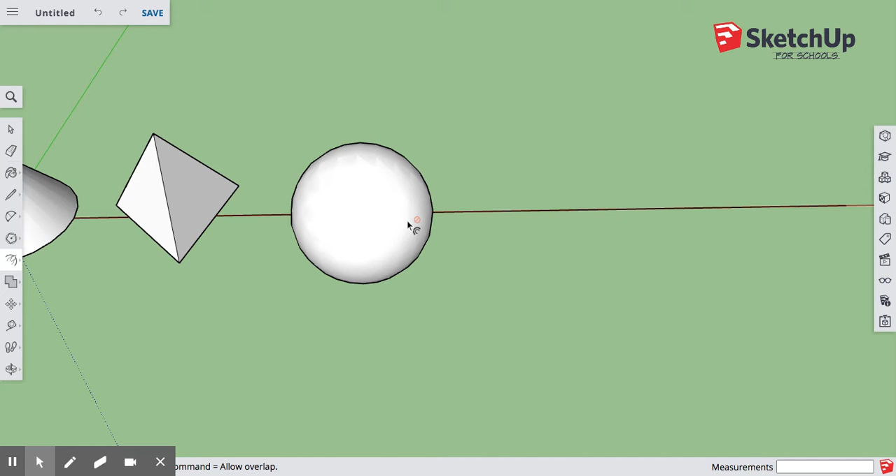All right, the next shape we're gonna make is a diamond - not necessarily like a gem, more like the diamond you'd see on a ring. So you take the polygon tool, make sure it's locked in on 3 right now like a triangle from our triangular pyramid, but you want to go 6, enter, to make a hexagon.

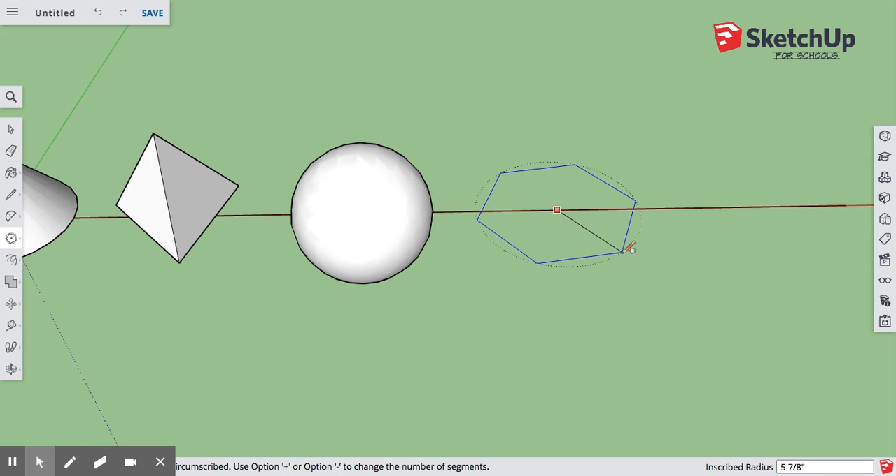Somewhere on the line, make sure you have enough space, and you write 5, enter. Now at this point, anything attached to this hexagon, you can delete the line. You can delete all those other lines.

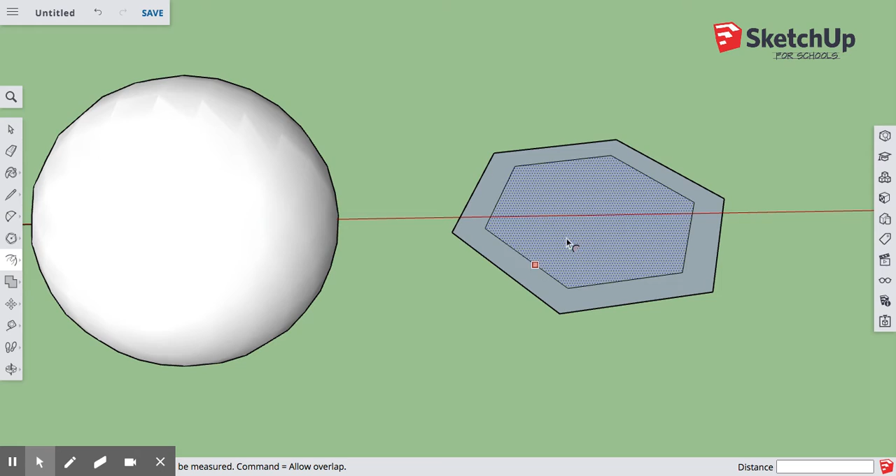So good. Now we're going to use a new tool. In push-pull, the bottom one is called offset. If you hover over the edge, all of the outside edges should turn blue. So you click that, and you write 1, enter. Now you've pretty much made the same hexagon, but a little smaller.

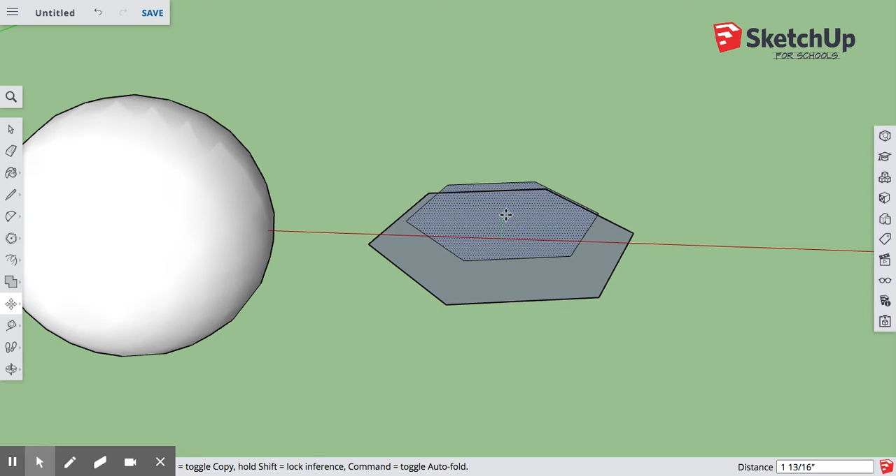Since you're offsetting it, it's the same distance from each of those sides. So that's a new tool, and now this is a new strategy with a move tool. Naturally, if you want to move this, it'll just move that one because they're 2 separate individual shapes. So if you click the move tool to access it, then press the up key on the keyboard, that locks onto the blue axis.

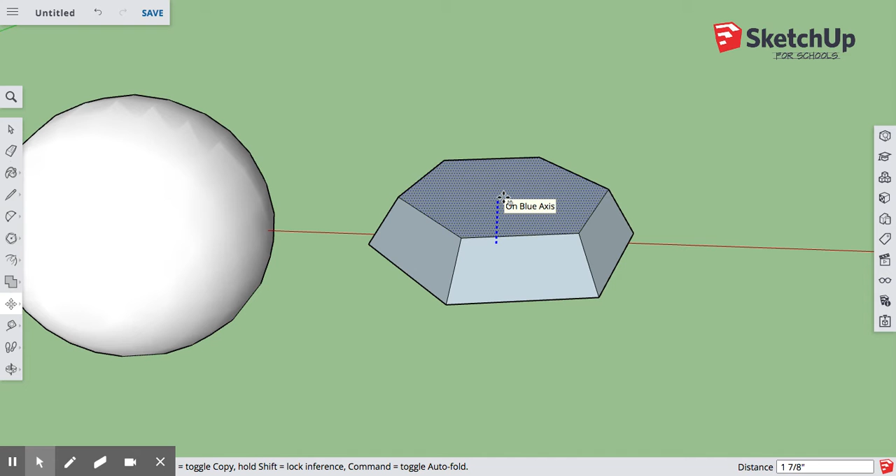So just to go over that again, if you click this, it'll naturally be moving along the red or green, but if you press up, then it locks onto the blue, and you go up 1, enter. So now you made that. That's the start of it.

Now something you're going to want to do is highlight everything - this might be helpful at this point. If you highlight everything and right click, there's a button you could click that says Find Center. Now you'll see there's a little dot that forms right there with what you highlighted.

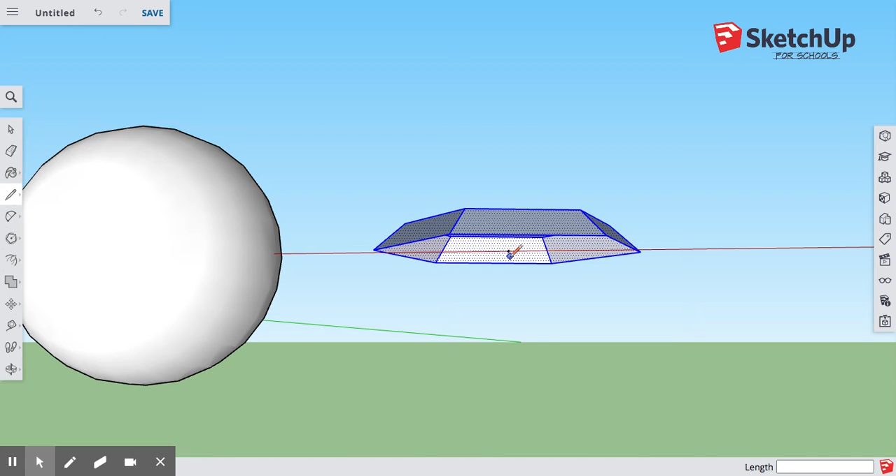So now the rest of this is pretty easy - you're going to just go down on the blue axis, 5, enter. And from there, from the tip of that, to every part of, really every corner. And that's your diamond. So very nice.

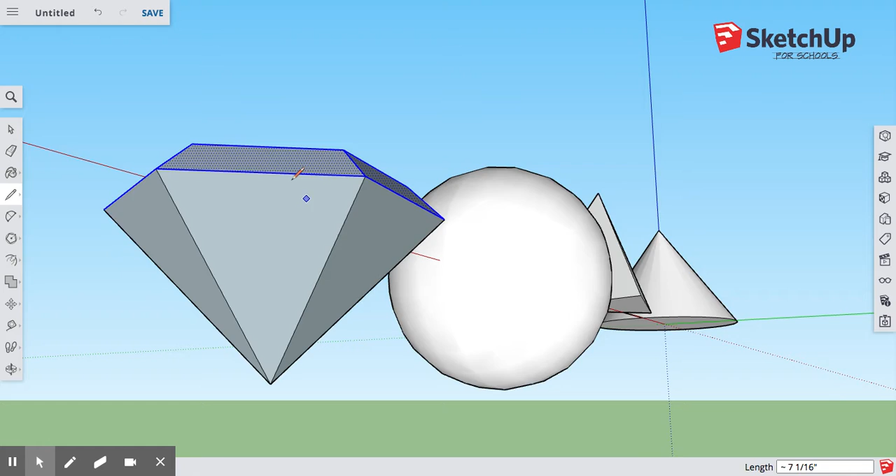Beautiful. Last thing we're going to do is make an egg. So you're going to take a circle. We're going to go as close to the red axis as we could find, and 5, enter.

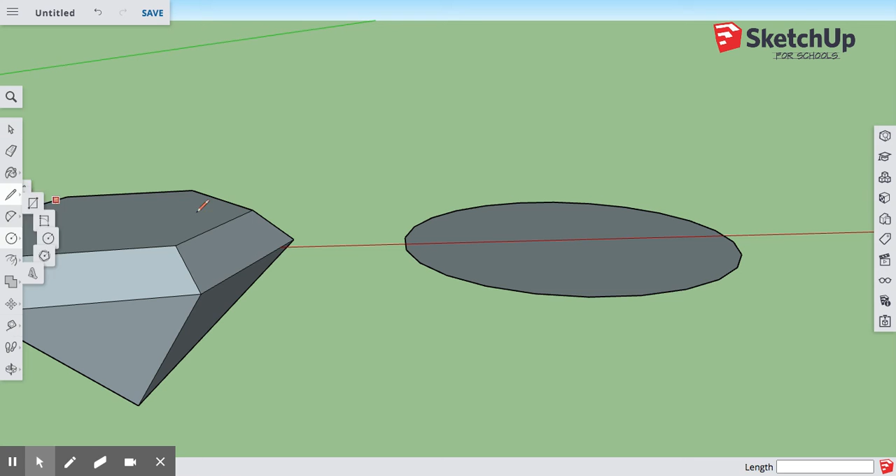At the center, if you can lock in on the center - I don't know why it's not helping you find it, it makes sense actually, so we're going to need to find the center. You can go to midpoint to end over there just to cut it in half. Then you can use the circle tool, it should now lock in on the center. And if you press the left key, now that locks in on the green axis.

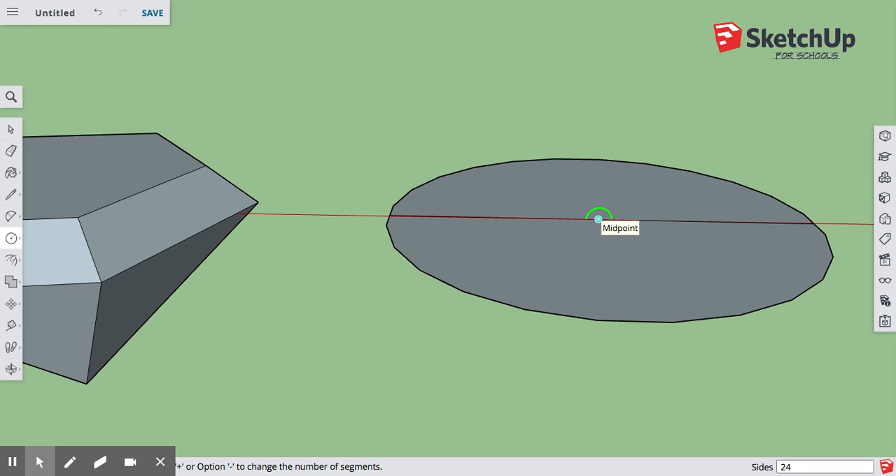So the left key - now we're working on pressing different keys to lock in on different axes. That's new for us. So we're going to make another circle that's the same exact size. Good.

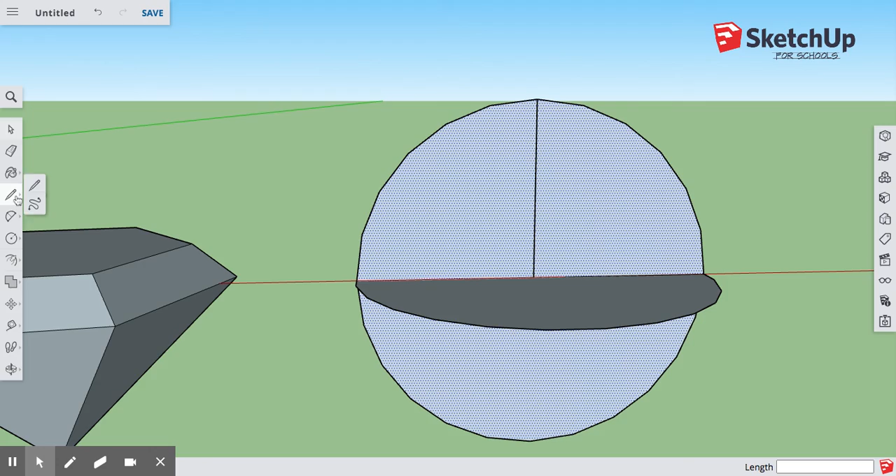And from there you find the center again. You cut this in half vertically. And you're also going to have to cut it in half - it shouldn't do that, it should actually work fine horizontally, but just to make sure everything is formed. And we're going to delete everything except for that little half that we made, that half right there.

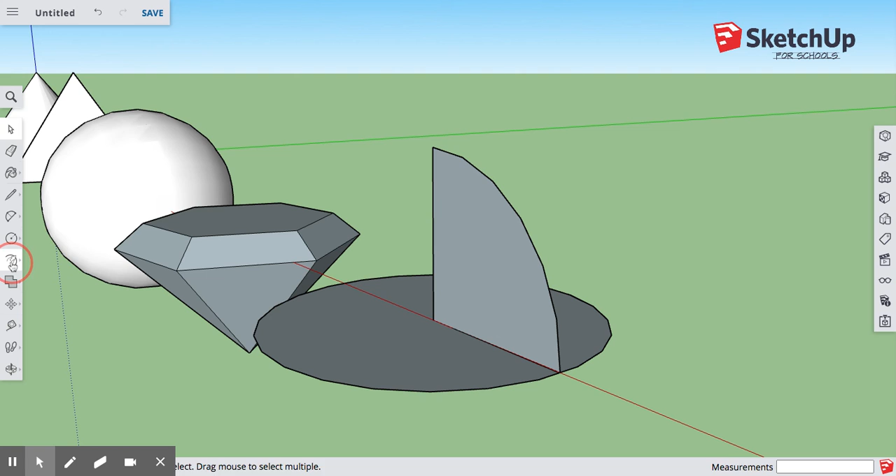And if there's another line going across, we could delete that. And what we do is use follow me to go across. Yep, and bingo. Good. So we have this now.

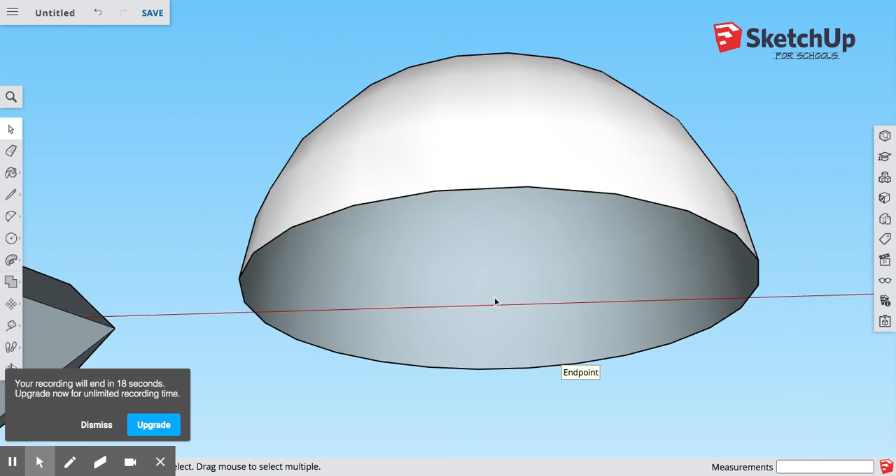And if there's a little line inside, that's going to end up messing you up later, so just delete that line. Nothing bad should happen if you do delete it. So do that, and then you're pretty much ready to move to the next step. And then I will show you the last step in the next video.